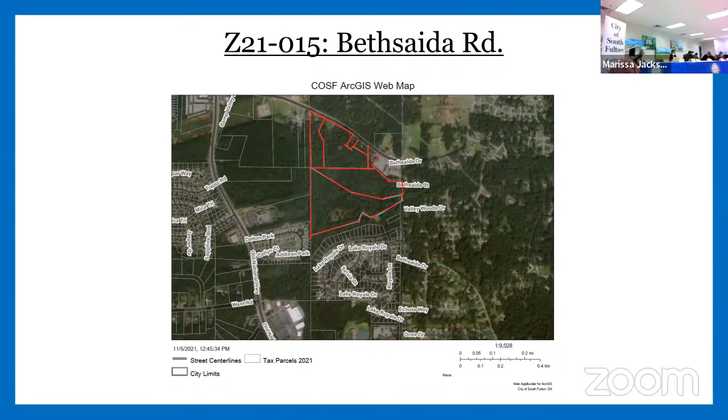Okay, so this is what is currently zoned - you can see it's zoned AG1.

The C1 corner was basically someone got that rezoned so they could have a wood shop in their backyard. So that's where the awkward C1 goes. It was like an accessory to a single family home many years ago.

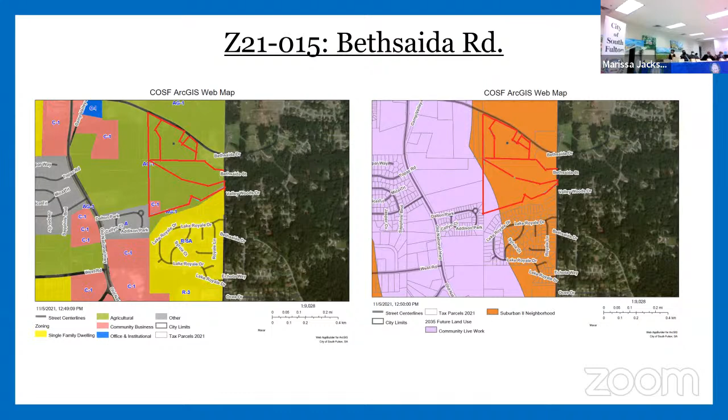This is the old future land use map. You can see that a majority of it is in the suburban neighborhood future land use, and on this side is community live-work. Next slide.

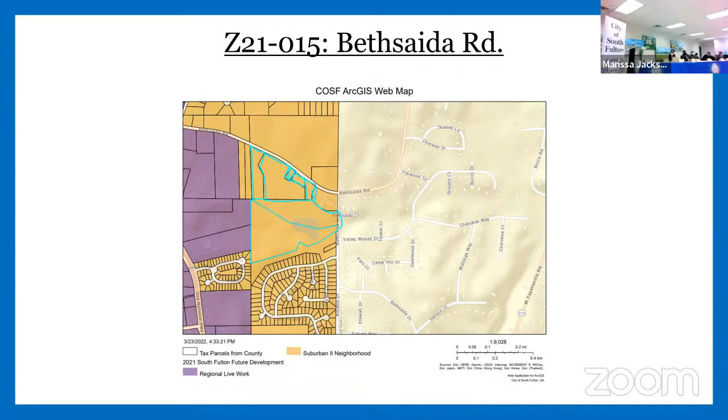Here is the updated future land use map. Since we didn't divide parcels on the new map, the entire property is located in suburban 2 neighborhood. This is an overview of the site plan.

It includes an entrance on Bethsaida Road, an entrance on Bethsaida Drive, 85 single family homes, 2 pocket parks, and a walking trail that goes through the property adjacent to some of the stream buffers.

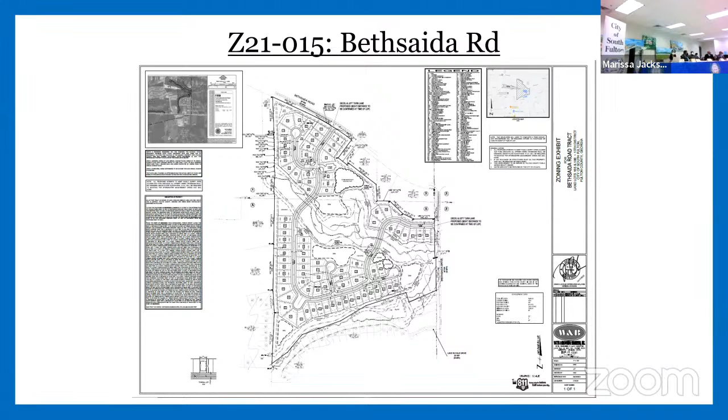The applicant was able to give us a few of their elevations. There are some conditions in your staff report concerning elevations, and staff recommendation is approval with staff conditions.

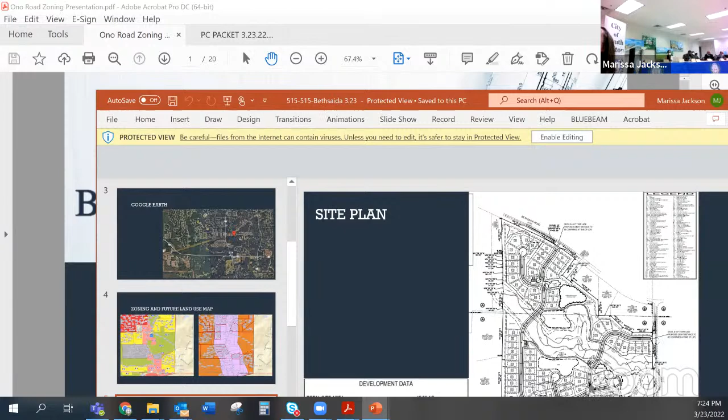I'm so sorry. She has a PowerPoint down here. Oh, it's on. Yeah, that one. This one? Yeah. One second, my time. No, I'm sorry. Staff has done a great job of describing the project to you all, so I'll try not to be redundant.

With regards to the site plan, we've got 45.98 acres of a fairly challenging site in terms of some of the environmental components. We've got 85 lots at a density of 1.85 units per acre, which is actually quite low compared to what is allowed in the suburban 2 district. Our minimum lot size is 7,500 square feet with a minimum lot width of 60 feet.

Looking at the site plan, we're on both Bethsaida Road and Bethsaida Drive, and we're immediately north of the Lake Royale community. As indicated, we are east of the Old National Corridor. We also sit right behind the Church Christians for Change, which sits at the corner of Bethsaida Road and Bethsaida Drive.

Throughout the community, we can see there's a meandering stream that V-shapes itself around the site. When you come in off the proposed entrance on Bethsaida, there'll be a monument sign there along with landscaping at the front entrance of the community.

Based on the site plan, we will be installing and required to expand the right-of-way, which is an 80-foot right-of-way requirement. We will have a dedicated left turn lane in and a dedicated right turn decel lane into the community. When you come into the community, you'll also see the mail kiosk down at the first intersection.

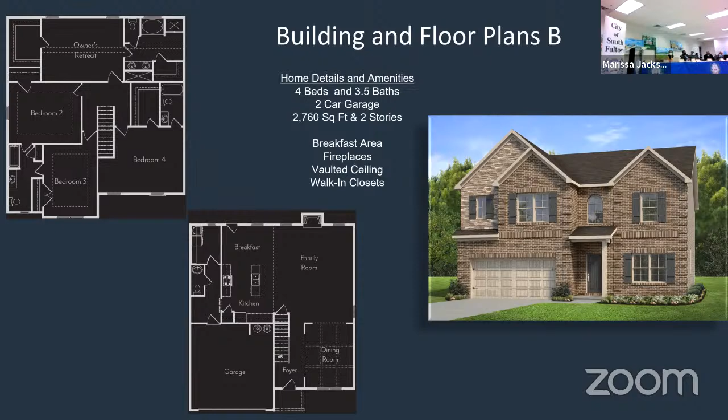You can see here another detail, another full brick stone front. This one's 2,760 square feet, 2-story, similar but a little different flavor, 4 bedrooms, 3.5 bath, 2-car. And then we have another elevation offered, 4 bedrooms, 2.5 bath, 2-car garage at 2,680 square feet. That's the last slide here.

In terms of what is being proposed, brick and stone facades, fiber cement siding, 25-year weatherwood shingles, energy efficient vinyl windows. Unit sizes are between 2,680 and 3,155 square feet, which is actually larger than the homes in the immediately adjacent community. The number of bedrooms are between 4 and 5. We do have garages, both 2- and 3-car.

We do have the walking trail, along with our starting price point, which has actually risen based on discussions with DRB. They're looking in the mid 300s and up on this project. We do anticipate it would take roughly 12 months to finish the development.

Taking care of the land development permit and installing the infrastructure, and then 6 months after that we will be looking at the first homes being available. These will primarily be marketed to those who are transitioning from renting, new metro Atlanta area residents.

A couple of things came out of the community meeting that we had, and we wanted to offer up to the community. Number one, obviously we have reduced the total density from 95 units to 85 units.

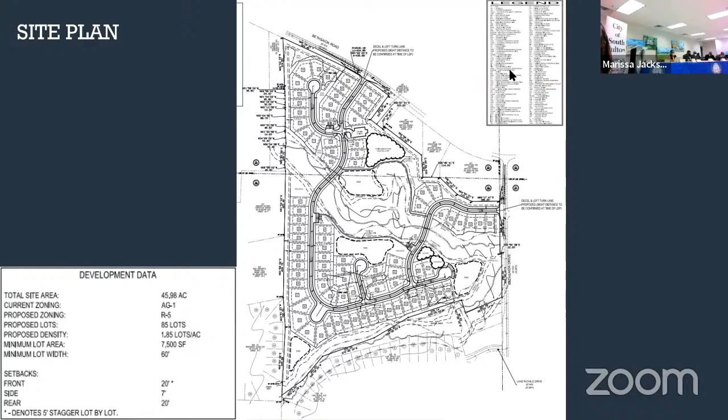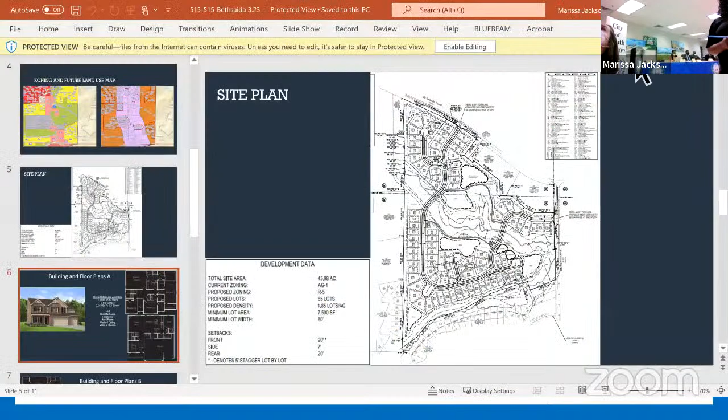We now hear case Z22-001. Staff, if we could, please. So this one is the PDF one. For Michelle. Yeah, okay. Oh, no. So my present. Yeah.

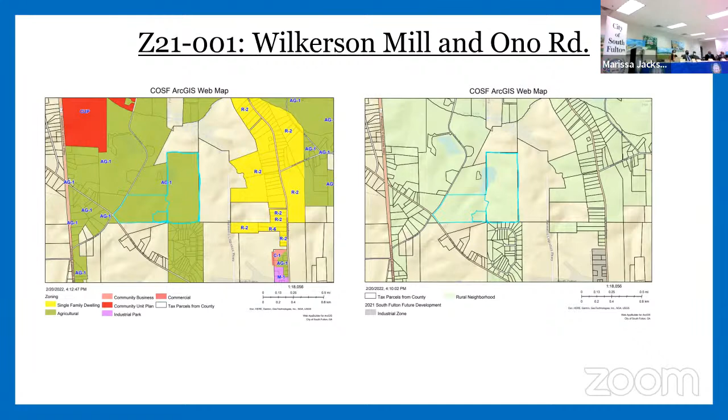So as you can see, the current site is zoned AG1. It's adjacent to the city of Palmetto. And the future land use, as you can see, is rural neighborhood. Next slide, please.

Yep, and that's the end of the report. Well, I put it on the first slide, but staff recommendation is approval with the conditions. Not staff, but the conditions. Yes, there are conditions in yours. And I can pull up the condition if that's—you don't mind? Please, so we got to go down.

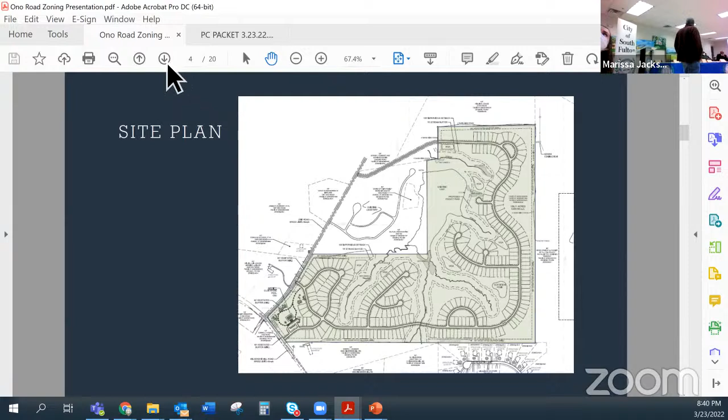My name is Wally, I live on Ono Road, 7210 Ono Road, been there about 12 years. If you've ever been on Ono Road, in our particular section, most of those houses are $1 million homes. We're competitive with Peachtree City, Fayetteville, Chattahoochee Hills, Alpharetta, Roswell. I don't understand why in the world we would want to approve high density project development in a community like that. You have people moving here from the West Coast, from New York, and a $600,000-$700,000 home in that area is no big deal. There is a market for a home in that particular area, but what we're getting is a project for the most part.

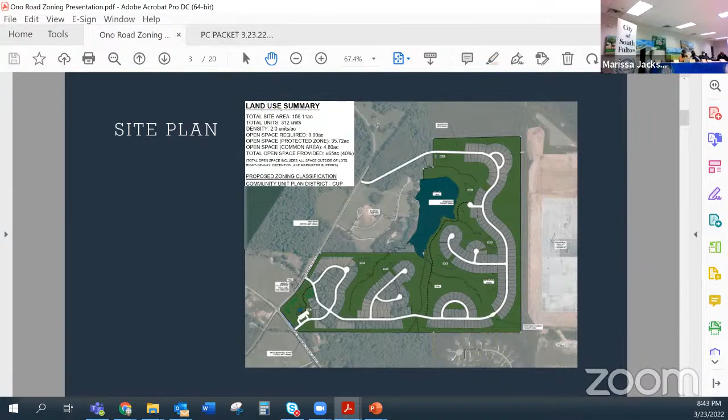We know there are right-of-way improvements coming along Wilkerson Mill. Because of that project, it was a development of regional impact, so there was an extensive study done of this corridor, particularly regarding truck traffic. The city of Palmetto is working with the applicants from that matter to address the traffic along that corridor. With regards to this project, we did provide that trip generation information, and we are abiding by the traffic improvements recommended by the city's transportation department. We believe we have adequately addressed those issues.

This is an area that currently is being redeveloped. You're seeing both with the city and on this side, development that is in alignment with the city of Palmetto's plan. Here we are presenting a plan that is consistent with what the land use plan and the comp plan say is appropriate for this area. We are not exceeding what is currently allowed, so we are within the concept of the land use plan. We are saving 65 acres of our site for open space. We've got the lake and some environmental things we're addressing there, and we're preserving the environmentally sensitive areas as required by the city.

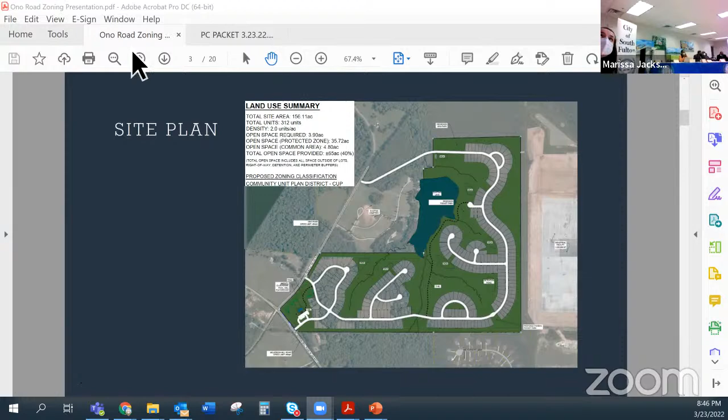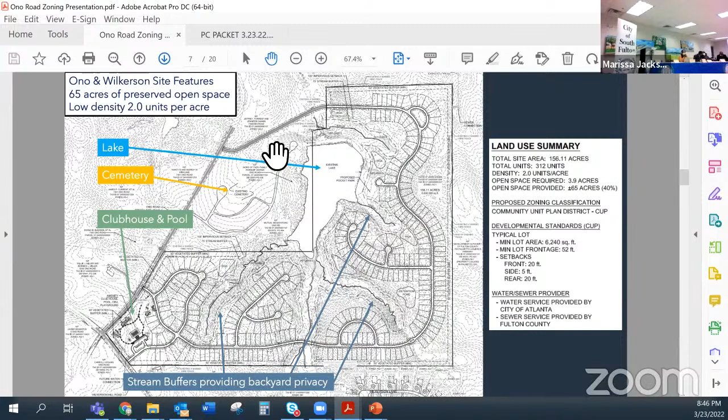If we go back a few slides, Bear Creek is going to be South Fulton. If you go back a few slides you can see — there we go. Sure, there you go. My presentation zooms out a little bit more, but South Fulton kind of sticks out. It's the gold part. South Fulton is the gold part. You look on the AG-1 — yeah, so South Fulton is the green part. And Palmetto is the beige part.

Okay, any other comments and questions from the board? One more question: have you engaged with the surrounding neighbors about this plan? We did have a community meeting to discuss the project. I believe we had roughly 5 to 10 people that showed up to the meeting. It was advertised properly. We sent out notices — the city requires us to send notices to all residents within a pretty large geographic area, I think it's actually a mile.

Chair recognizes Mr. Jones. How did you notify them, and how? We have to send out a postcard to all the residents. It's a fairly large postcard. To all? Yes. How long was that sign there? I posted it last month. No, we don't post a sign. That sign — did you put that sign there last month? Yeah, I can tell you the date.